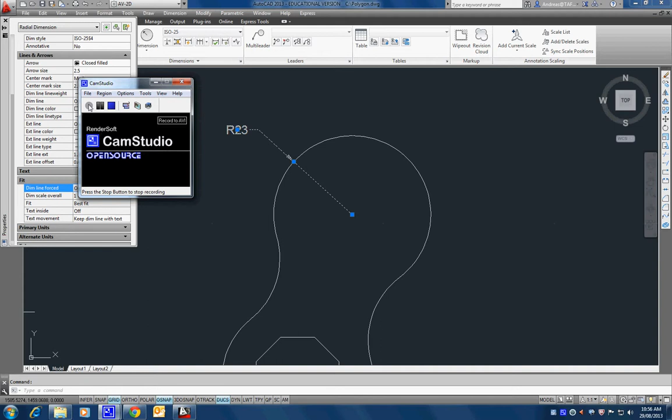Okay, I'm just going to talk about how we can modify this arrow on this dimension here. What you can do is click on the arrow or on the dimension, then hover over the blue grip to bring up this menu, and you can use the flip arrow option by clicking on it to flip that.

Stretch will just make it move. So if we just leave that back for now, there's a couple of other things I can show you here, and one of them is...

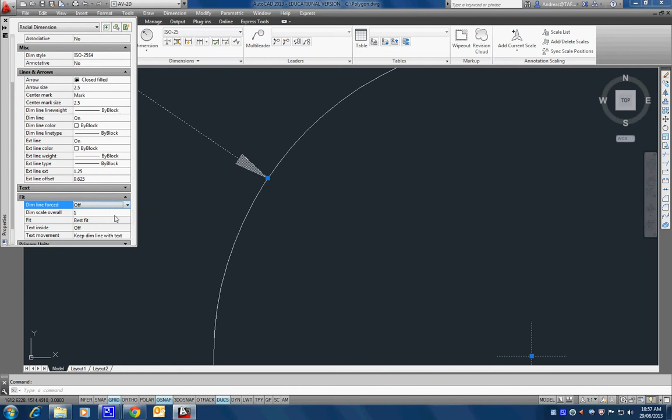Here we can turn off that line that goes to the center, and that mark remains, but we can turn that off from here as well. None, for example. And basically that's that there.

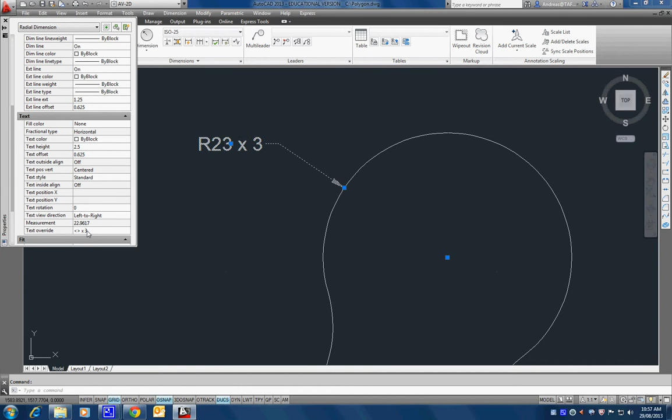Under text, there's some other additional stuff that you can also do. For example, down here under the text override, you could add some note to it. You could go like that—that means maintain the number that's in there and add some text to it. You might say, I got 3 of those 23 radiuses, so you put X3, for example, and if I hit enter, it adds that number. Alright, that's a good thing.

But for example, if we stretch this thing here, that's the dimensional update. The dimension didn't update, but if I move that to that, it didn't update, unfortunately.

The idea is if the number updates, then that will remain—the 23 will become 25, say—but the times 3 will remain in there.

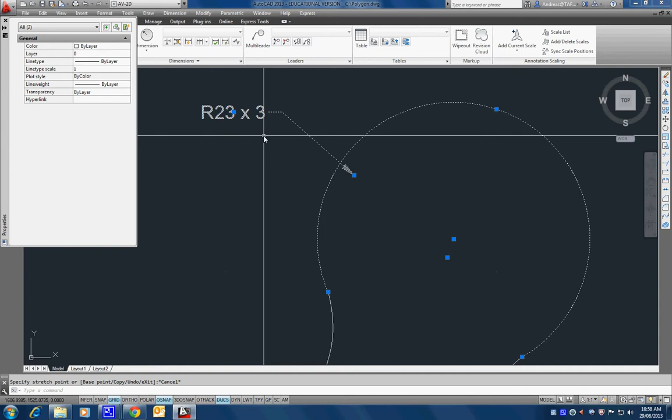Yeah, I mean, typically it works better with a linear one. So if I measured this here to there, across here, that's what it is—25.14, only because it's not set up properly, it looks like that, but you could just quickly fix that up so it looks right. Just make it round into 0. So that number is like that.

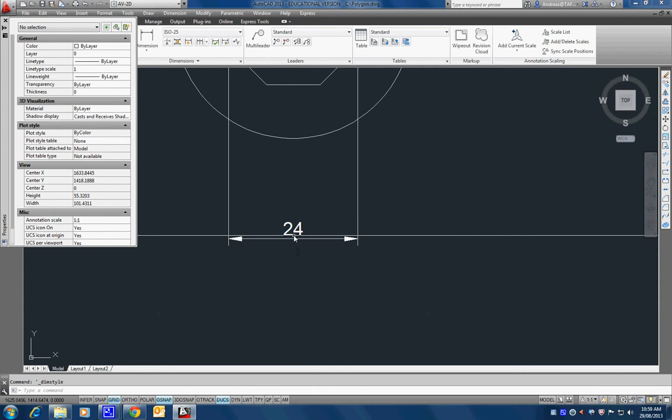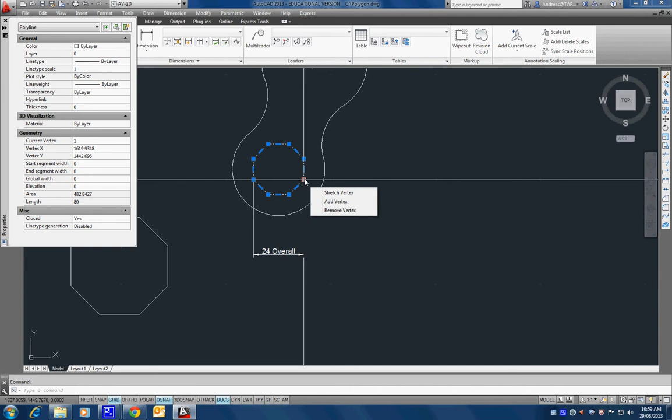So if I wanted to click on here, I could go to the text, which is further down the bottom of the text section, by putting in the shift key in this one and the other one—greater than, less than, greater than. It maintains a number, and I could say, for example, something over all dimension or something like that. Yeah, so that'll keep that. But if this thing grows, the theory has it changes and the dimension changes—that's become 43.

There's a few other little tricks as well. What is it, I think the properties screen—you can do it by highlighting something and right clicking, that's one way, or Control 1, it'll bring the properties screen up. There's a couple of different places as well you can get it.

But under here, while we're talking about dimensioning, if I wanted the overall to be on the next line, it'll do that. It'll just give it an extra enter by simply putting the backslash P, no space in between here. These are sort of advanced tools, but you can also put the usual stuff in here, like percent D for degrees and things like that, if you needed that, for example.

Alright, so that has been today's training.